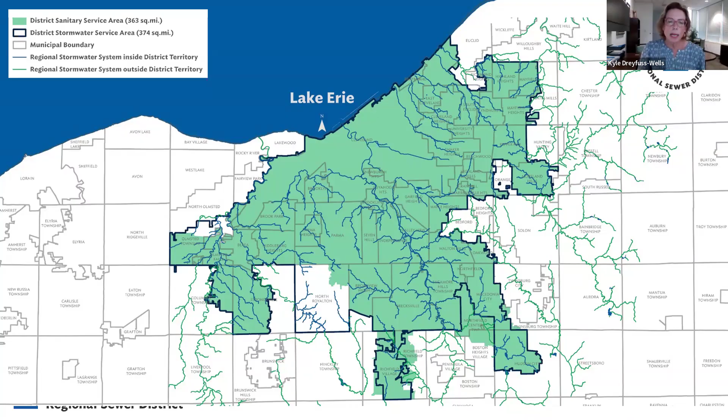So we do our work at the sewer district across 3 program areas, and you can see these here: running the region's 3 wastewater treatment plants, addressing the region's legacy issue of combined sewer overflow with Project Clean Lake, and again, our focus tonight, our regional stormwater management program, helping our member communities address flooding, stream bank erosion, and water quality issues.

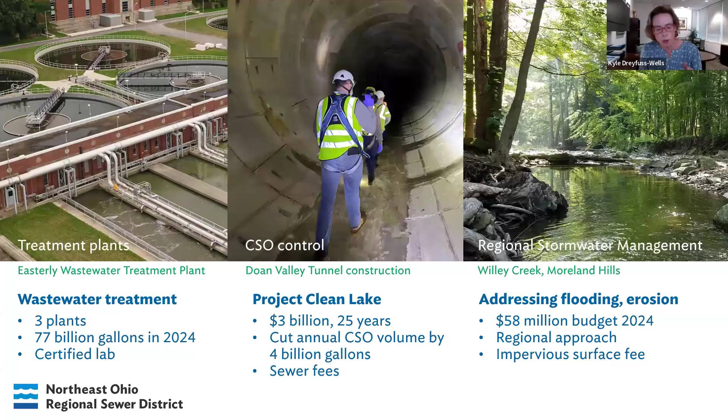So with that, just a quick introduction to what we're going to talk about tonight, a quick review of the sewer district and our regional stormwater management program. I'll turn it over to my colleague, Matt Scharver, to talk in detail about our updated recommendation. Thanks, everybody.

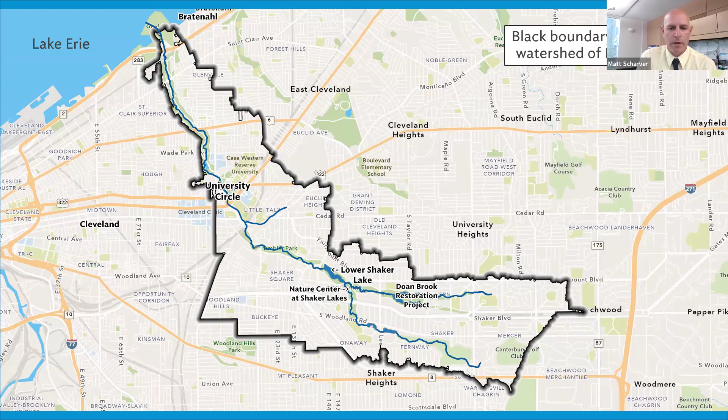And so we'll zoom in here to the lake area of the watershed. And intuitively, you would think that the lakes within the Shaker Lakes would store stormwater or flood flows and be a benefit to the downstream portions of the watershed. But this is where our stormwater modeling has shown us that that's just not the case.

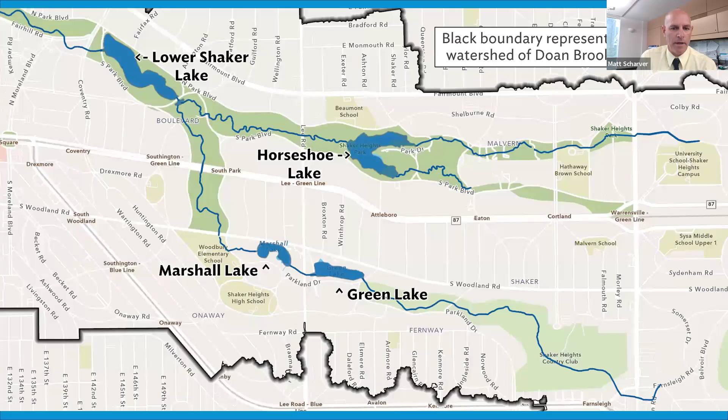And we're going to walk through some detailed information to illustrate how we've come to know that to be. So this just sets the stage of where the lakes are and really helps to illustrate that the Doan Brook watershed has issues or problems all up and down the watershed, and our modeling efforts were put in place to try to understand the potential solutions for those problems in the different communities and the alternatives that we could bring to bear and move forward as recommendations. And those recommendations sometimes change as we learn new information.

So we'll move into the update for the Doan Brook restoration at Horseshoe Park, because this is a project that we're advancing after lots of discussion and public forums to understand the best way to bring this project forward. We're right at the 100% design stage, and we're moving through our federal, state, and local permits and approvals, and we hope to achieve those here in earnest over the next couple of months before we are able to move into our public bidding process and move ourselves into position to get under construction in early 2026.

You can see the amenities that the member communities of Shaker Heights and Cleveland Heights are contributing to at the tune of nearly $7.2 million as a complement to the overall effort to remove the Horseshoe Lake Dam and restore Doan Brook, both its middle branch and north branch, into what will be a transformative 60-acre parklands within the Shaker Parklands. The district is contributing about $24 million towards that overall effort, and those dollars are focused under the Regional Stormwater Management Program on the stream restoration, the floodplain capture, and the wetland creation that will be in concert there to address and properly manage the stream flows of Doan Brook.

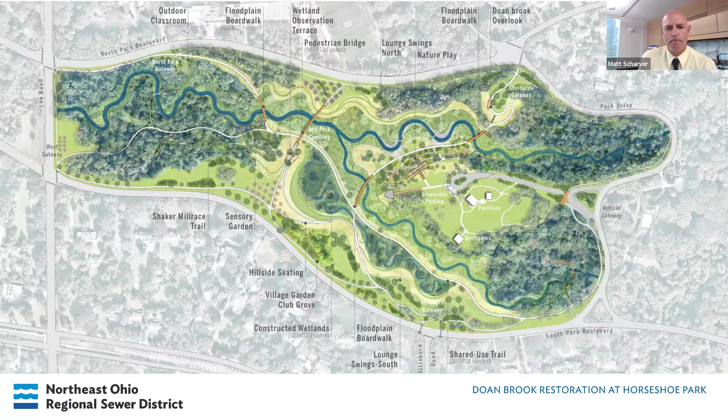And you can see the amenities throughout the park that the cities are contributing. And this illustration just shows you from an aerial view rendering of what this transformation will come to be. And so we hope to bring this project to the community here in 2026 through 2027 as we get under construction.

And so let's focus back to the lower Shaker Lake and our findings under our stormwater master plan. So I'm going to walk us through where we are today and essentially a period of time. And time in terms of years are going to be important to understand as we go through this analysis. So the timeline, and I'm going to show a graphic here in a minute, but 2021, the district launched and was in the midst of our Chagrin River, Lake Erie Direct Tributaries Stormwater Master Plan. So this was a master plan that we had launched, again, to understand the different problems in the watershed and potential solutions to solve those problems. That master plan included Euclid Creek, Dugway Brook, and also Doan Brook. So Doan Brook is a part of that 2021 Stormwater Master Plan.

And then we moved into the 2023, well, I'm sorry. And I think we would advance the slides here, John. And we'll just walk through the timeline here.

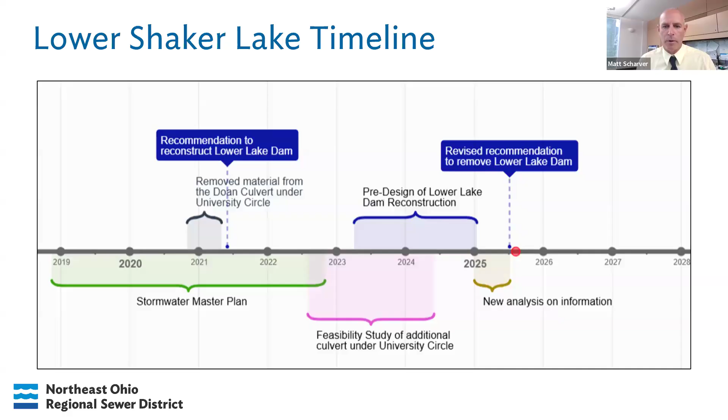So let's first step back and talk about the Doan Brook watershed concerns. And I'm going to focus a little bit of attention on the Lower Shaker Lake Class 1 high hazard dam and its compliance issues. So we'll first move through that. And as we do that, it's important to note the different entities that have roles and responsibilities. So for folks maybe joining the conversation today for the first time, the Ohio Department of Natural Resources, under their dam safety program, they're responsible for compliance of classified dams. In this case, Class 1 high hazard dams.

And then we have the cities of Shaker Heights and Cleveland Heights, who are the dam operators. They're the responsible parties or entities to comply with the state's standards, in this case, the Ohio Department of Natural Resources. The city of Cleveland has a role to play as well. They're the underlying property owner and they're the dam owner. And they lease the parklands in long-term leases to both the cities of Shaker Heights and Cleveland Heights.

And as we mentioned at the top of the webinar, the district has a regional stormwater management program, and we're in the conversation because we bring resources to bear to address issues: flooding, stream bank erosion, and improvement to water quality along the regional stormwater system, which is about 489 miles across all of our member communities in our service area. So that just sets the stage for the responsible parties involved.

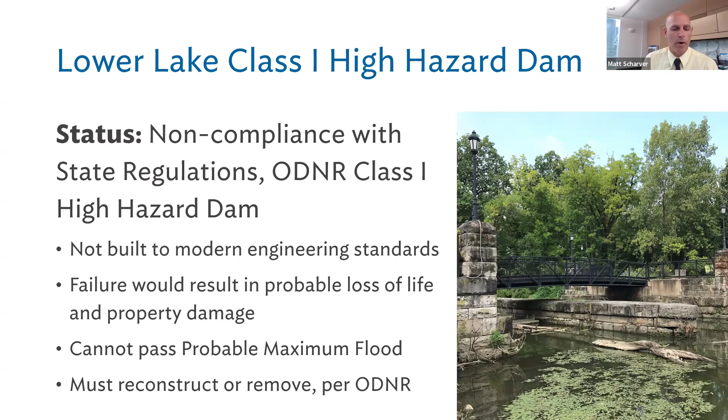The cities of Shaker Heights and Cleveland Heights have performed maintenance on the dams at both Horseshoe Lake Dam and Lower Lake Dam. But irrespective of maintenance, the dams simply do not meet or match current standards, and reconstruction of those dams would be required to meet those standards. So those are the two choices that are basically brought before the two cities today: reconstruct Lower Lake Dam or remove it.

And so that's a significant problem in the eyes of the Ohio Department of Natural Resources, because the embankment itself is made of soil and it's not protected with a hardened surface. So repetitive overflows or exacerbated overflows could cause that soil to erode and lead to an uncontrolled breach or a catastrophic failure.

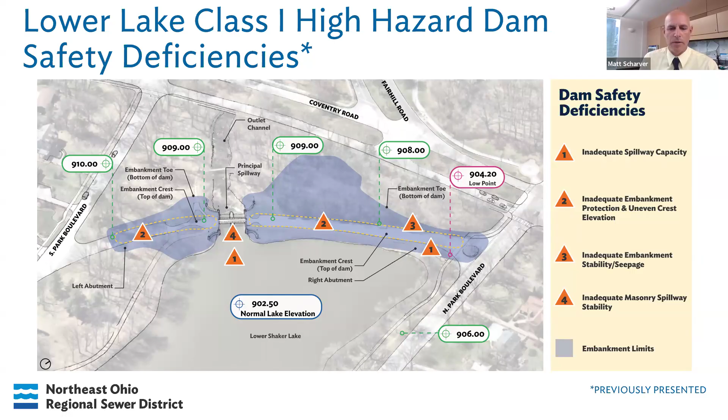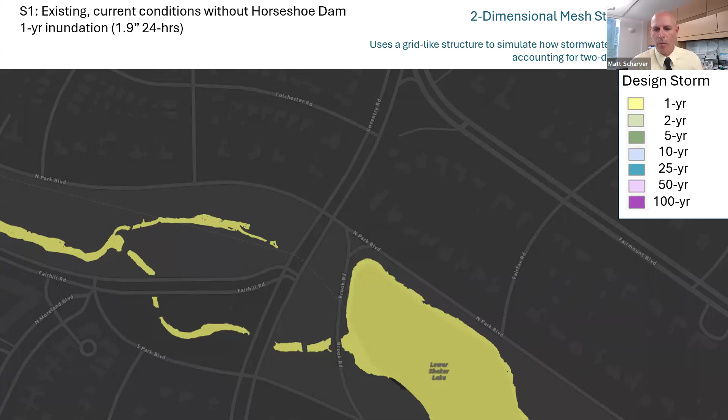So if we move to the next series of graphics, we're going to show you what we've learned from the sewer district's perspective in terms of the flooding specific to this area of Lower Lake. And there's a series of design storms that I'm going to walk through that take you from the 1-year event through the 100-year event. And the 1-year event, you can see in the graphic, is about a 2-inch rain event in a 24-hour period. And then we're going to move all the way up to about a 5.2-inch rain event in a 24-hour period. But this is using updated modeling, called 2-dimensional mesh stormwater modeling.

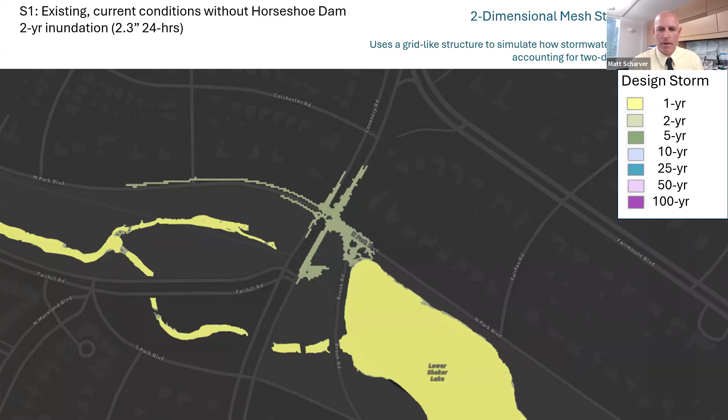So we looked at new modeling as we were moving through those different pieces of the timeline that I mentioned at the top of the presentation, where we gained more information and refined our modeling to understand what's happening specific to Lower Lake in terms of its flooding adjacent to the dam. And so as we continue to move through the graphic here, you can see that the flooding expands in the intersection through the 100-year event. So this is an immediate issue right adjacent to the Lower Lake dam facility. And so the 100-year event in purple, you can see it covers the entire area.

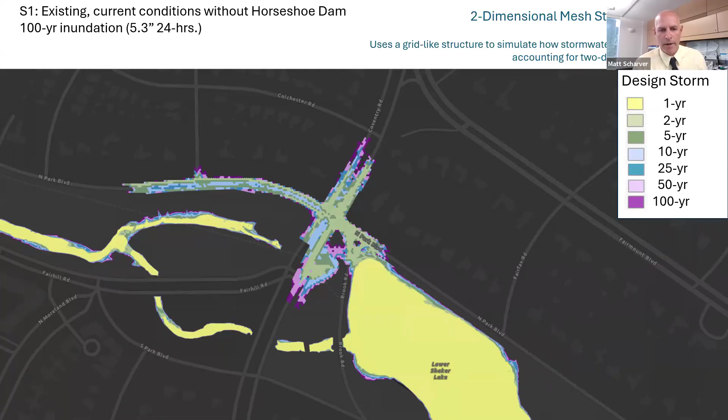Now, when we move to the University Circle area, this is another problem area in the watershed. And as I mentioned, one of those 4 elements that help us address the flooding in University Circle is an additional culvert conveyance within the culverted section of University Circle. So this graphic shows you the Case Western Reserve campus, the Parkside dwellings, which had a water rescue in the recent past, and One University Circle.

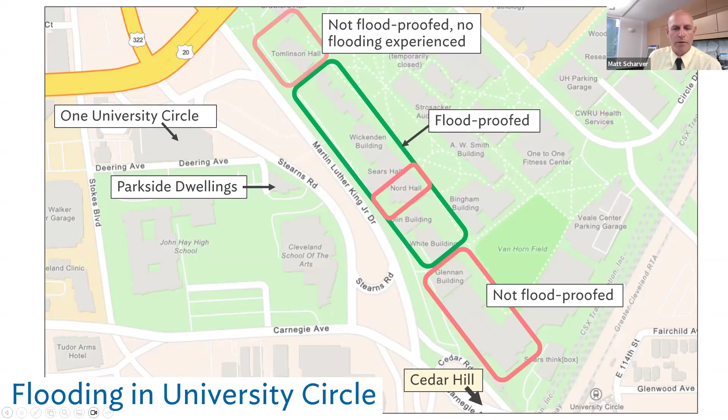Pay particular attention to the screen where it says Stearns Road and Martin Luther King Jr. Drive. This is where you're going to see the brook that's in a culvert in this area actually present itself on the surface as we move through the next series of slides that show our modeling graphics.

So it's similar to what we showed at Lower Lake in terms of the flooding immediate to Lower Lake. This is another area of the watershed that floods. So on the right of the screen is the Cedar Hill area. And as the water moves down from the Cedar Hill area through the Doan Brook Culvert, which is a 1-mile culvert underneath University Circle, you can see the flooding increases as we move from the 1-year to the 2-year.

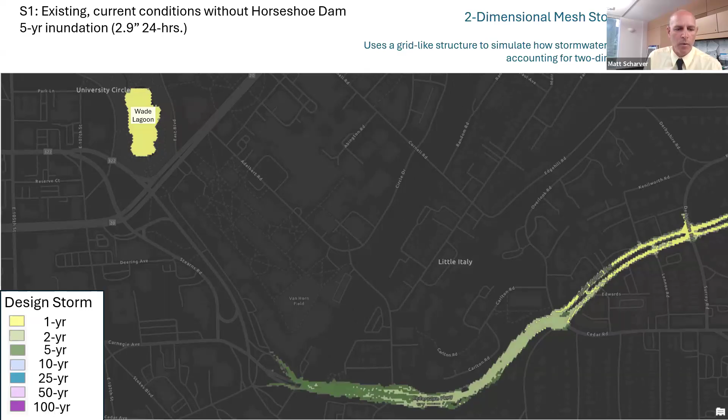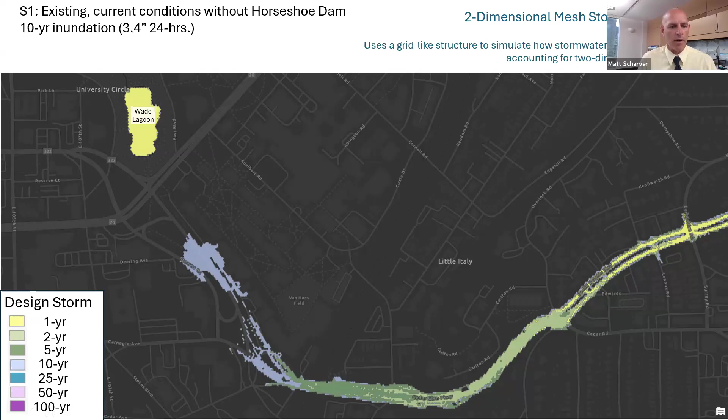And once we get to the 10-year event, which is a blue color here that you see, that area at Stearns Road where it's labeled, that's where the Doan Brook Culvert actually is full and starting to surcharge onto the surface and starting to show significant flooding impact in that low point in the watershed. And as we move through the 25 and the 50-year event, we have greater precipitation from 4.5 inches all the way up to the 100-year event, which is about 5.25 inches of rain in a 24-hour period.

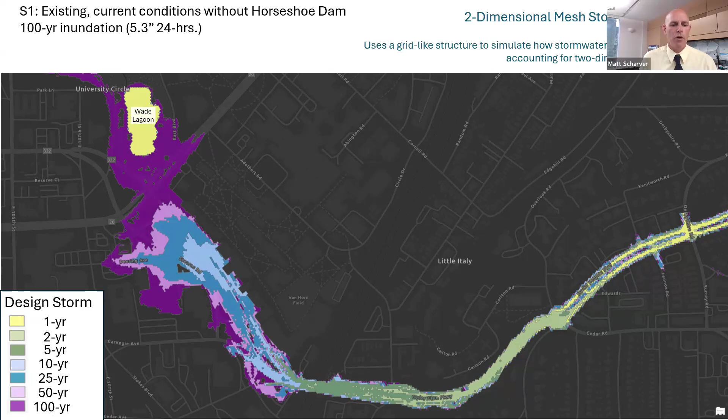You can see the flooding is quite exacerbated in University Circle. But this additional culvert that we'll be able to install will help improve the flood conditions in that area. And I'm going to show you some graphics later on that will better illustrate that.

So moving back to the Regional Stormwater Management Program and the addressing of flooding and dam compliance, as I mentioned, in June of 2021, we had moved forward with our master planning and made the recommendation to reconstruct Lower Lake Dam. And all the while, we had talked about removing the Horseshoe Lake Dam. So there's two projects moving in concert in the watershed and trying to understand how they work together.

So the Shaker Lake timeline, again, is important to understand. That 2021 master planning findings taught us initially what was happening in the watershed. But moving through the 2023 dam reconstruction pre-design showed us some additional elements that helped us understand what was happening in terms of the Lower Lake Dam reconstruction. So now I'm going to walk you through a few of the findings that we have related to the dam.

And so there's really four elements to the dam reconstruction that we focused on back in October of 2024 that we brought forth to the public. And the first one is a concrete gravity dam. So as we mentioned, Lower Lake Dam is an earthen embankment and it needs to be replaced or reconstructed to meet modern standards, to meet ODNR's requirements. And to do that, we would build a new concrete block to replace that earthen structure. And that's what it essentially looks like here in the middle of this graphic.

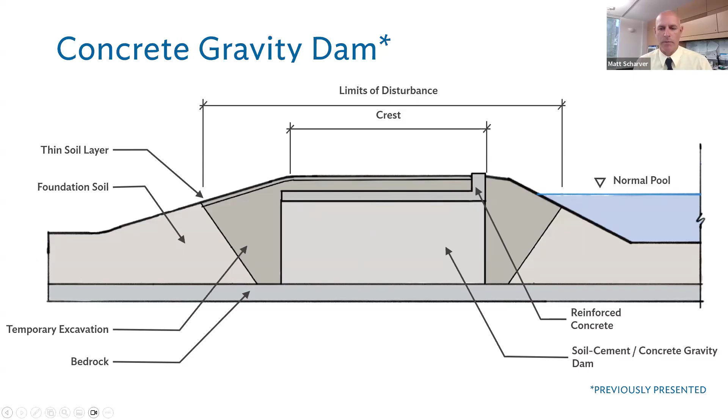So you can see essentially a big concrete block that will stay in place if the dam were to experience that probable maximum flood or any high flow events. And so that protects the dam from having an uncontrolled breach. The next element that we'll show is the principal spillway. I'm sure that all of you recognize the stonework at the Lower Lake Dam, and that is the principal spillway. That's the main outlet point of the Lower Lake into the Doan Brook, and all of that would need to be reconstructed. So that's the second main element.

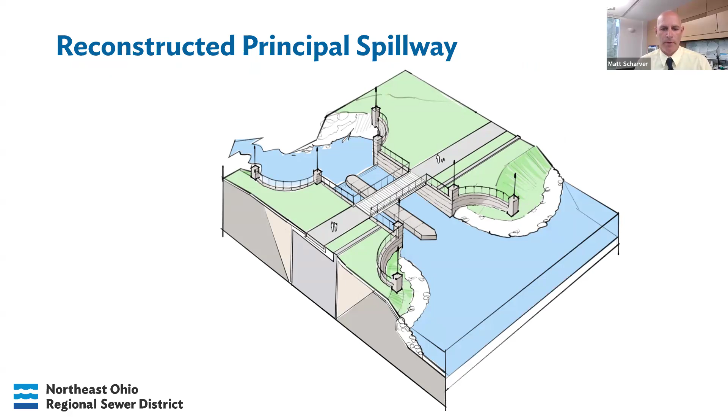And then the third element is an auxiliary spillway or a secondary spillway. And so in order to convey flows completely to address the probable maximum flood, we need an additional spillway. And so the graphic that you see here shows what that would be. It sits out in the lake. It's made of concrete. It's quite obtrusive. And you can see that it is necessary to convey these larger flows.

And I'll also mention in this graphic, you can see the trees that are currently between Lower Lake Dam and Coventry Road. Those would need to be removed because the dam height there is too high. Again, we're going to have to convey flows through and over the dam during that probable maximum flood event to meet the state's requirements to be a compliant Class 1 dam.

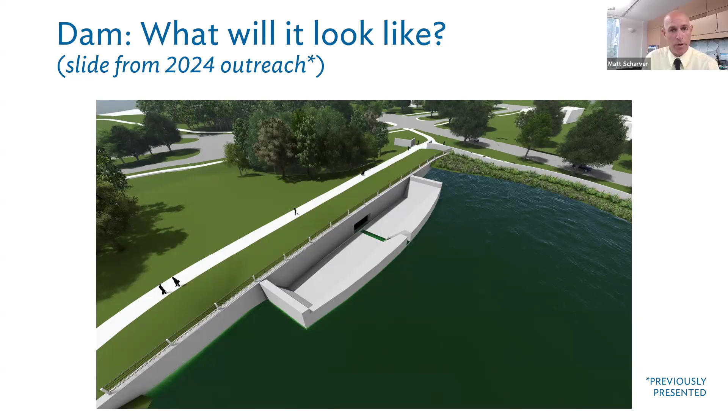Then the last piece of this are the flood walls. The flood walls are necessary to train or direct the flows of Doan Brook upstream of Lower Lake through the lake and over the dam, not allowing those flows to escape out of the lake as they do now onto North Park and Coventry intersection. Those flood walls at the current dam location were to be 8 feet tall, and then they taper back to about 2 to 2.5 feet tall as you approach Fairfax back to the east. And there's also flood walls on the South Park Boulevard side.

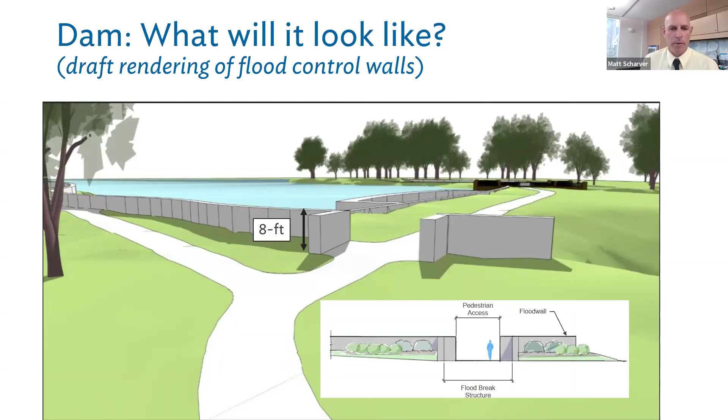So again, these were pieces of information, large civil works that we were learning were necessary to be constructed to reconstruct the Lower Lake Dam. They come with great expense and they're quite obtrusive and aesthetically not pleasing to the park landscape. So again, these were elements that we were considering as part of our evolution of information. So that's the dam reconstruction itself.

The other part of this overall effort to address issues within the Doan Brook is the additional culvert in University Circle. So we're going to move through some graphics on the additional culvert. As we do that, it's important to understand that, as mentioned before, we're collecting more data. There's more modeling inputs. There's refinement to those modeling inputs and data analysis that allowed us to understand the information and the decision point that we've brought forward here in 2025.

When we did the 2021 Stormwater Master Planning, we had one monitor in the watershed. It was a planning level, one-dimensional modeling effort in 2021. We deployed 6 additional monitors up and down the watershed to capture more data. We also input into our updated model actual storm events that helped us calibrate and revise the model. These elements helped us get a truer, more accurate understanding of what was happening throughout the watershed and specific to University Circle, which was a problem area that we were trying to solve.

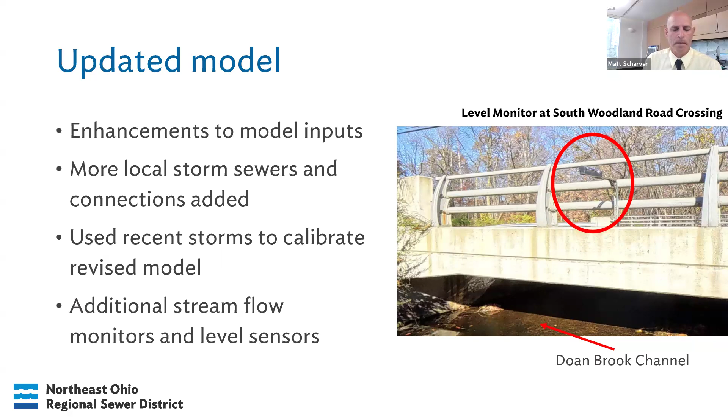This next graphic shows the difference between the 2021 modeling effort, in terms of the drainage network that we knew and had put into that model, versus the revised modeling and additional inputs in the new model. You can see on the right there's many more yellow lines. Those are local storm sewer inputs that we added to the model. Greater inputs pushed out greater accuracy in terms of what's happening in the model.

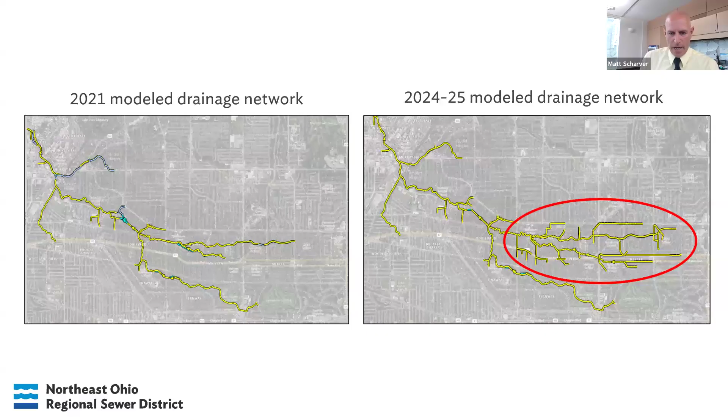In addition to that, two-dimensional mesh modeling helped us understand how water was moving over the surface of the watershed, flowing into catch basins and through local storm sewers and draining into the brook. All of this information was giving us a truer, more accurate depiction of flood conditions on specific assets within different parts of the watershed. Next, we're going to move you through the modeling updates and show you what that means. We can advance to the next slide here.

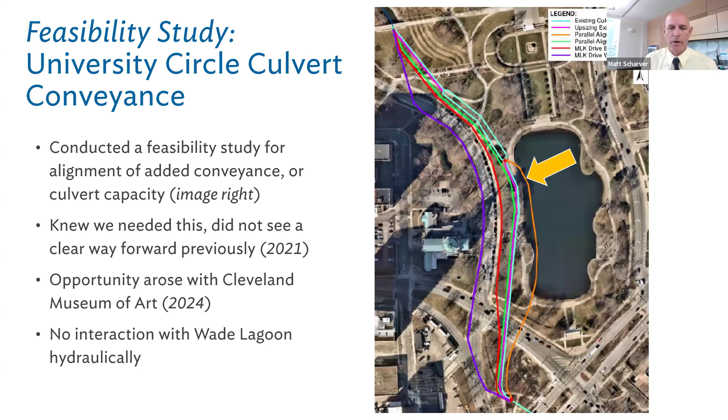And just to note, there's no interaction between the Wade Lagoon and the culvert. They're separated hydraulically. Wade Lagoon is simply a surface pond. It doesn't have storage for the Doan Brook. It's not connected to the Doan Brook other than just outletting into the Doan Brook. So we're going to walk through this analysis and show you some of the information that we learned in terms of our refined modeling effort based on this additional culvert conveyance.

So again, here we are at the Case Western Reserve campus in the Stearns Road, Martin Luther King Jr. Boulevard area. And so there are three modeling scenarios that we'll share this evening. One, we'll show you with the existing Lower Lake Dam, without the University Circle culvert or this additional culvert. And then we're going to show you two scenarios where we have the University culvert installed in place with that additional conveyance and that additional level of service that it provides for University Circle. And one of those we'll show you with Lower Lake Dam and one without Lower Lake Dam. So we'll just move to those graphics.

And the first graphic that you're going to see is, again, no additional culvert in University Circle. So this is the Case Western Reserve campus buildings and the buildings within University Circle. And you're going to see two polygons appear. And in the circle polygon, you're going to see two buildings. One is in purple and one is in light pink. And you can see the level of services that they match in that design storm legend. So the purple building's at the 100-year level of service and the pink building is at 50-year level of service. And then the polygon below shows those other two buildings. So under this condition, again, this is the existing University culvert, no additional culvert with the Lower Lake Dam. There are 13 buildings that flood at the 100-year event.

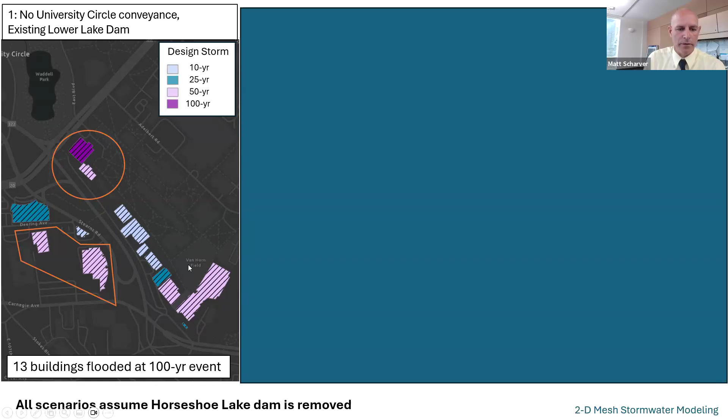As we move to the next graphic, we introduce or put in place the University Circle culvert conveyance. And what our modeling has shown us is that those buildings that were circled or in the polygon are now protected to the 100-year level of service or raised to an improved level of service. In fact, they come off of our asset list. So we moved from 13 buildings in University Circle to just 9 buildings now flooded in University Circle, based on that additional culvert conveyance capacity in University Circle once we build that capacity.

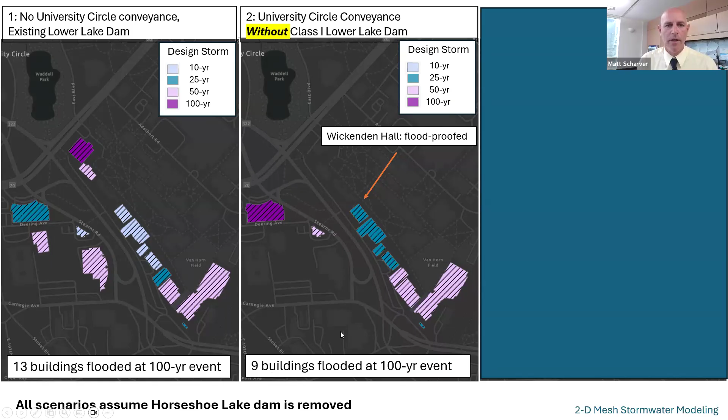The third graphic that we'll show is the difference between having the University Circle additional culvert conveyance with the Class 1 reconstructed Lower Lake Dam. And so this is the difference between those two scenarios. And what we're focusing on here is one building in the Case Western Reserve campus, the Wickenden Hall building, which is already flood proof to a certain degree.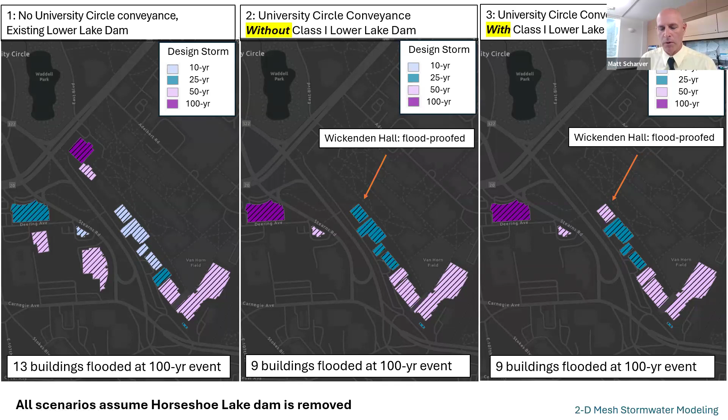And so that's what our modeling showed us in terms of results. Again, the additional culvert in University Circle is important to University Circle, not necessarily the Lower Lake Dam, in terms of improving flood condition in University Circle. And we know that the area immediate to Lower Lake Dam can be solved with removal of the Lower Lake Dam, as we are able to appropriately convey flows through what will become the new stream valley at that location of Doan Brook. So moving to the next slide.

These other considerations were also part of our equation. There's ecological impacts to dams. Removing dams increases water quality and brings a general ecological uplift to a watershed. We also need to consider the ongoing maintenance and operation costs of a Class 1 dam. Yes, there are life cycles for the dam components. Some components of the dam will have a 50-year life cycle. Some may have much greater life cycle. All of those components will need ongoing maintenance and operation costs to ensure that the dam operates as it should and meets any state requirements.

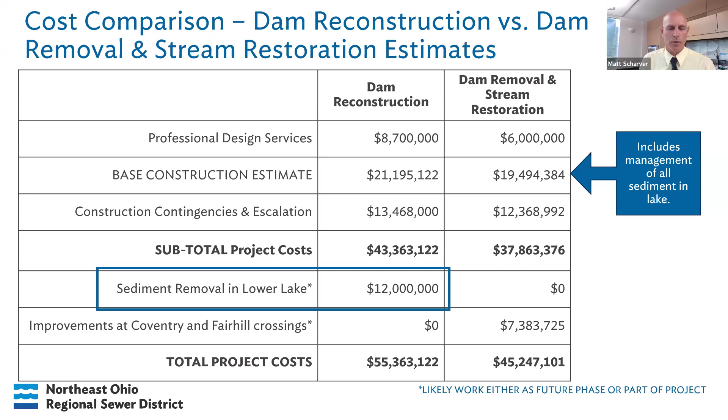But the Regional Stormwater Management Program, because water quality is one of our 3 pillars of implementing the stormwater program, can assist the cities if they were to choose to move forward with the removal of the dam, to remove the dam and rehabilitate or restore the Doan Brook in its corridor at that cost of roughly $45 million. So those are the cost points associated with the recommendation today.

And so just to summarize, again, points in time are very important to understanding how this recommendation has changed and evolved over time. 2021 Stormwater Master Planning, we had a set of information at that time. We committed to the Lower Lake reconstruction. But as we moved forward in understanding the feasibility of the new additional culvert in University Circle, we better understand now that we can address that conveyance issue in University Circle.

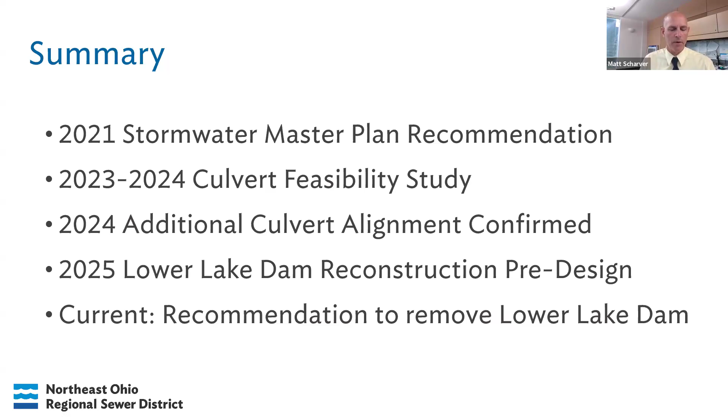That additional culvert analysis was part of our equation, but the refined modeling effort that came forth from our efforts to ensure that we designed the appropriate project at Horseshoe Lake Park helped us understand the flood condition throughout the watershed and proved that the Lower Lake Dam just simply does not provide notable flood benefit downstream, and therefore was the opportunity to revise the recommendation for additional reasons: ecological uplift reasons, the cost of the project escalating due to the heavy civil works, in addition to the aesthetics that were going to change the current status of the park landscape as we would know it today. So those are the elements that were evolving together in concert.

So we'll continue this discussion and we'll continue our efforts in the University Circle area as we move into a pre-design effort to, again, solidify that additional culvert capacity within University Circle.

And so as we had mentioned in past presentations, we will be at the Lee Road Library in Cleveland Heights tomorrow at 11 a.m. and there till 1, and then we'll again be there in the evening in person 5 to 7 to answer questions and further discuss the revised recommendation to the cities.

And as always, we have our website, the Lower Lake website, where you can see all this information and additional information. And our watershed team leader, Cisco Rivera, is our main point of contact. And Cisco will be with us tomorrow morning and afternoon to help answer questions.

Great. Thank you so much, Matt. We've been answering quite a few questions within the Q&A function, but some of the questions we received have a little bit more nuance, or it might just be a little bit easier to explain those in person with my wonderful panelists. So you've already had the opportunity to meet Kyle and meet Matt, but I would like to also welcome Kim Kolish to the conversation. She's our Stormwater Program Manager, and I'm very glad that she's here today because I do have my very first question for Kim.